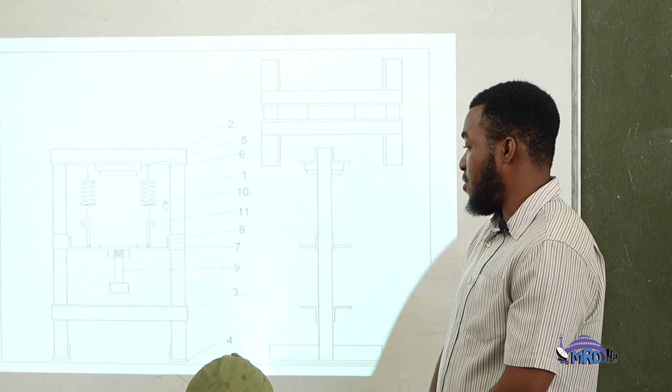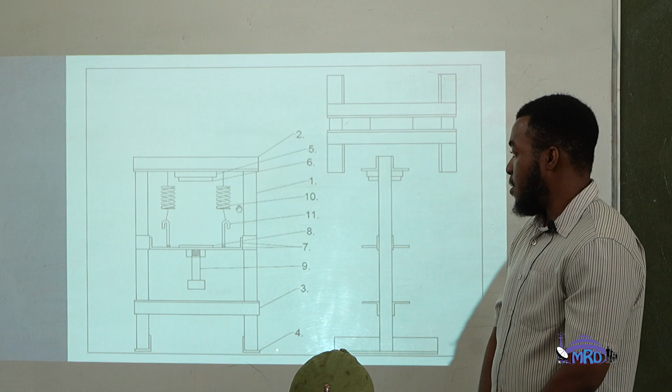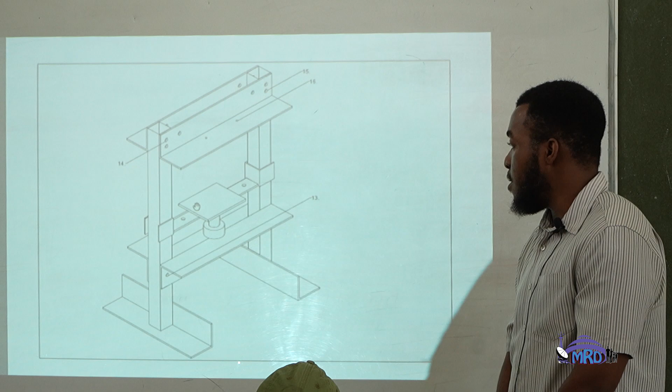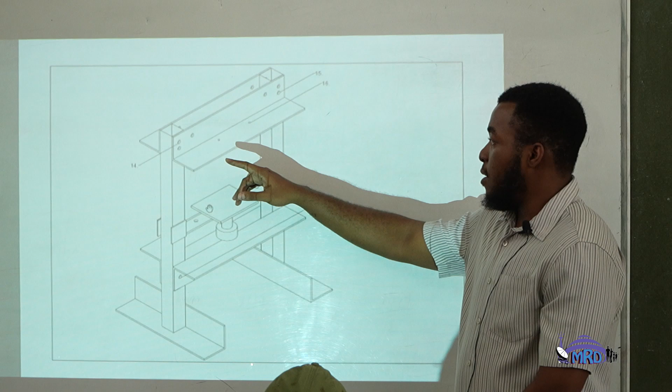Assembly drawings. Here we have an orthographic drawing of the hydraulic press. The front view, the plan view, and the side view. For the sake of continuity, I labeled each part in reference to the parts list. We also have the isometric drawing, so this one is also labeled. For the sake of space, I only labeled the holes for the key bolts and the hex bolts.

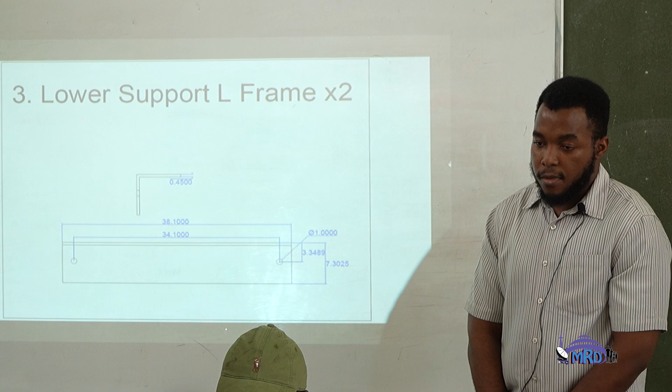Move on. Here we have individual technical drawings for each machine part. We started with one, square frame, by 2 for 2 pieces. The upper support L frame with the front and side view, as well as dimensions for the holes. The lower support L frame, which is the L frame just above the base, the L base frame.

The square plate, number 5, which I said was the black plate just above the three-ton jack. The bottle jack stabilizer. This was used with the intention to stop the three-ton jack from shifting when it was in use. The bottle jack support. Well, this is the black beam that the three-ton jack is supported on.

The base for the bottle jack to rest on, and the ram that is going to be used for the actual pressing operation. Yeah.

Tools, equipment, and machinery that were used during the development: the heavy-duty equipment were the horizontal bandsaw, the milling machine, the center lathe, the angle grinder, and the drill press. The welding plants were the arc welding and gas welding.

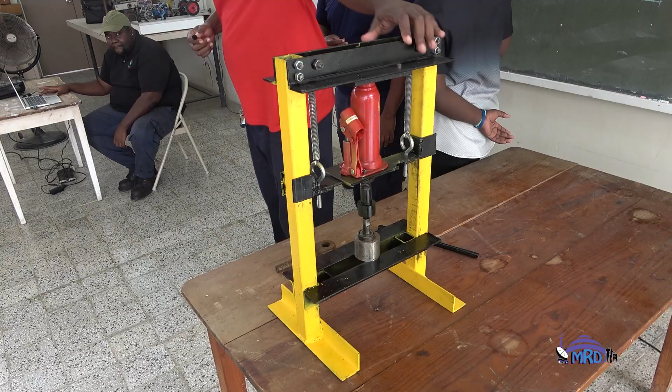As you see here, we got the various pieces that we assembled individually first. The channel, the angle, as you can see here. That would be these two parts here, the side frame. First thing we did, we had to tack these pieces to just make sure we got the right alignment before we drilled.

This piece is the base where you will have the pressing that actually takes place, which is this area here. We have the springs and the bolts. One of the challenges we faced when we were first assembling, we had hexagonal nuts and hex head bolts, but they were too big, which would be this area here. So we had to replace them with Allen key bolts in order to get it to work.

This part is the actual stabilizing plate to stop the jack from sliding when we apply any hydraulic force. This area here. You can see we got the finished assembly here. Now the process of this, before we put everything together, we had to take each individual piece. So before you could come and measure this part, you had to measure one side, line it up, assemble it first, tack it, then test it, then disassemble it again and repeat our process at least 3 to 4 times to make sure you got everything in proper alignment.